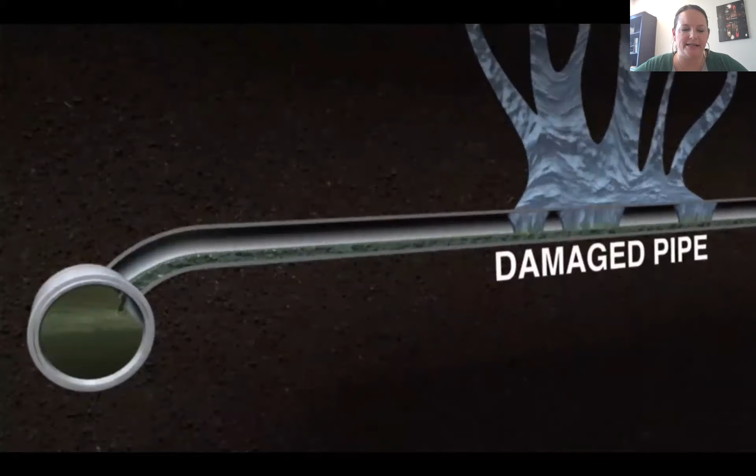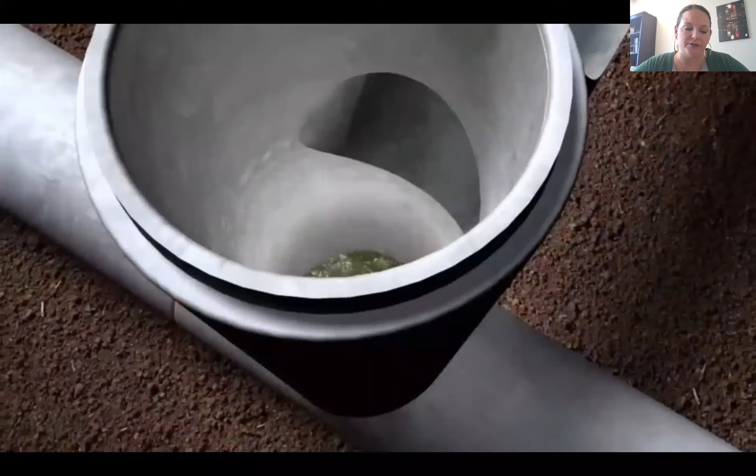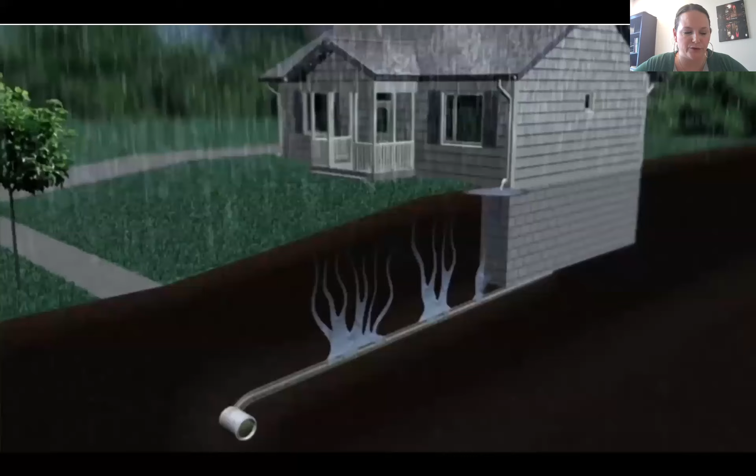When it rains, water gets into aging and damaged pipes through cracks, leaky joints, and runoff from the roof. Most rainwater is getting into the system from residential areas, and the sanitary sewers were not built to carry lots of rainwater. So sometimes during heavy rain events, the sewers get too full, overflowing into rivers, like you just saw, or backing up into basements. One solution is to build bigger sanitary sewers, which treats the symptom of too much rainwater in the pipes. However, Blueprint Columbus is designed to solve the problem at its source, keeping rainwater out of the system in the first place and routing it through green infrastructure to create cleaner stormwater discharges.

Next slide, Nick. So that's our problem. The issue is this rainwater is getting into our sanitary sewer and it's causing problems. The sanitary sewer has two ways to go: it can go out and overflow into our rivers through the storm sewer system, or it can back up into your basement with raw sewage coming up from the floor drain. Neither one of those is good at all. We don't want exposure to either one of those things. And so that is the root of this whole project, is to solve that problem that's happening right now.

The EPA put us under a consent order to fix that issue in Columbus, and that is one of our goals. The other goal that we have comes from the normal rainwater rushing down the street, picking up all the things that are on the street as well. That could be dirt, oil, trash, anything that's there. It carries it away into the storm sewer and eventually out into our rivers, so that also is polluting our rivers and streams.

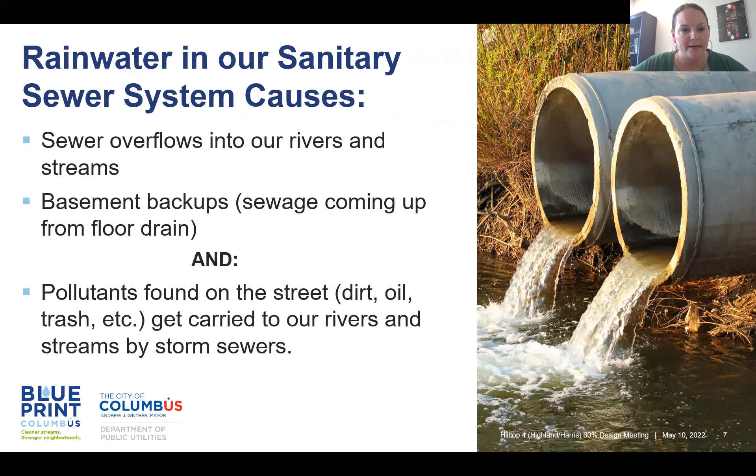Next slide, Nick. Blueprint is a different kind of solution, right? We're trying to be innovative and green, and we're interested in not only putting a Band-Aid over the problem, but fixing it at its source. So we want to fix our existing infrastructure, invest in what we already have, to create a better system, a better working system. We're using local crews, local materials, we use native plants. And all of this helps us to not only fix the issue of sanitary sewer overflows, but also to create opportunities to improve stormwater discharges.

Like I said, our project wants to invest in local. So our crews, our design engineers, project managers, outreach team, they're all from around here. We're wanting to add permanent local jobs, and some of those jobs are even the maintenance. These rain gardens are permanent fixtures, so they will be permanently maintained, and those also are jobs that are created.

As Elena had said, this project is a little different than other city projects. Most of the time the city's working underneath the ground or somewhere around you, then they cover it up and leave. But our project leaves something behind, something that's in front of your eyes forever.

That's why it's really important to us to engage with you as neighbors and community members early in the project, so we can talk about your concerns and questions, and what we don't know about your neighborhood that could help our design team leave the best product in front of you as an amenity to your community. And of course, this project also addresses the consent order requirements that the EPA put Columbus under.

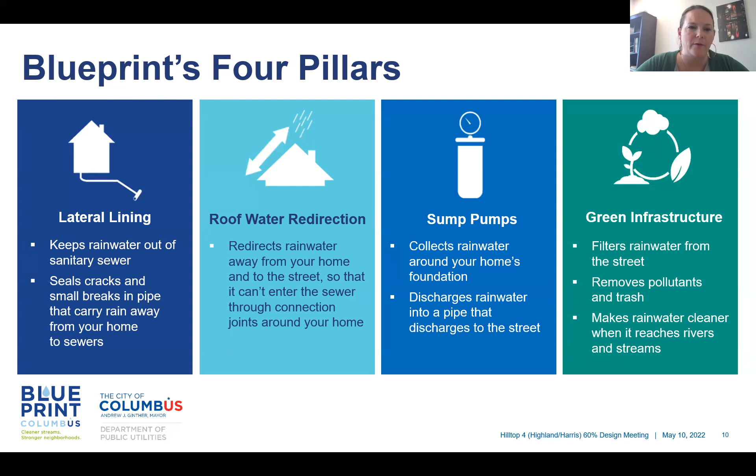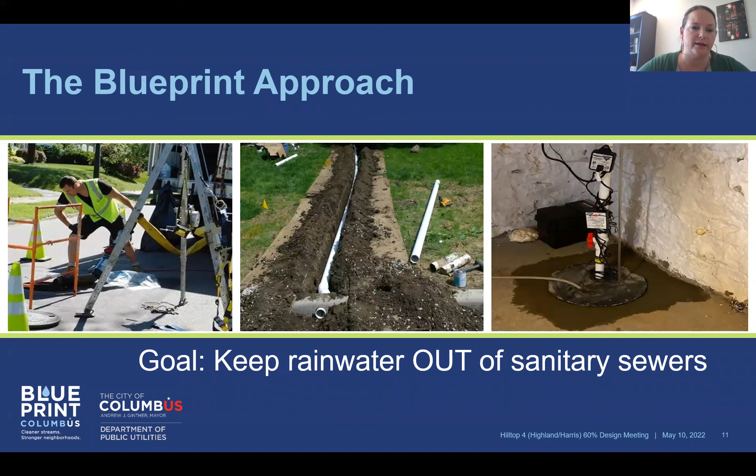The blueprint approach takes these pieces of the puzzle and fits them together. The picture on the left shows a person lining a lateral through a manhole. The middle is a downspout redirection, and the right is a sump pump. All three of these work to keep rainwater out of the sanitary sewers, whether by sealing up that pipe or moving the water away from where it could get in.

Lateral lining is done through the manhole. It's very non-invasive. We send a balloon-like structure through the pipe, blow up the balloon, and on the outside of it there's a substance called resin. That resin sticks to the inside of the sanitary pipe, and when it hardens or cures in place and we pull the balloon out, the pipe is like brand new.

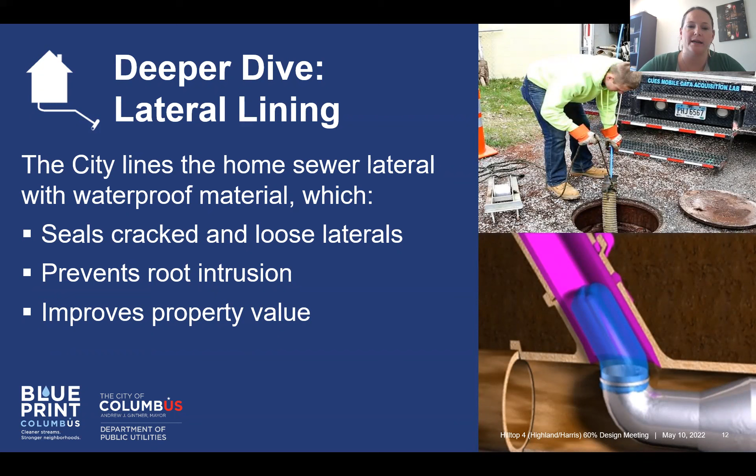Next slide. Roof water redirection is where we start to move the water away from our foundation and away from any places that could seep down into that sanitary lateral and get in.

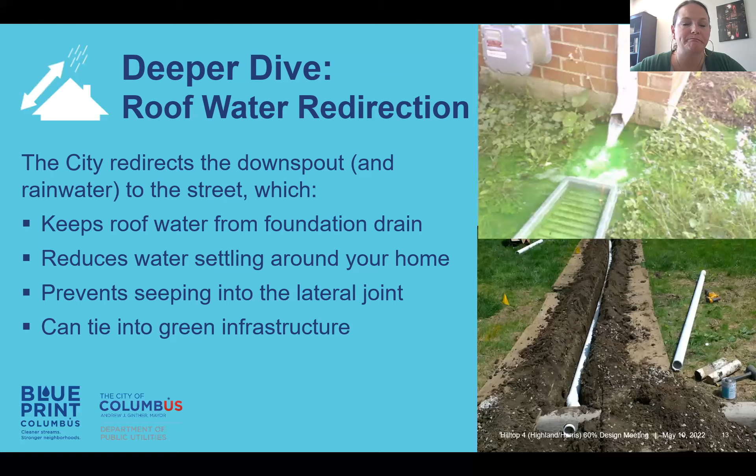Next slide. Sump pumps work similarly. A lot of our homes, again, are older, and the foundation drain is directly connected to the sanitary lateral, which is bad. That means rainwater is directly getting into the sanitary sewer system and adding to that overwhelm.

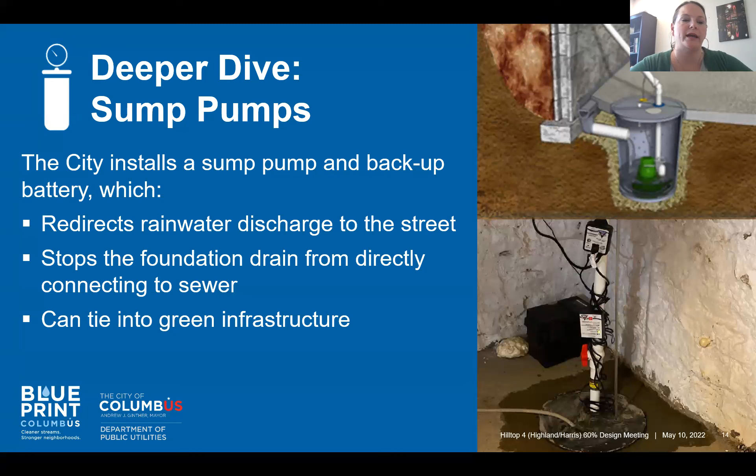What we do here is disconnect the foundation drain, connecting it to the sump pump, pumping the water up and out towards the street, again like the roof water redirection, where we can tie it into green infrastructure where possible.

Next slide. Green infrastructure itself is the piece of the puzzle that receives the water that we're moving. In the first picture, we're seeing the rainwater rush down the street, maybe picking up leaves and debris. But now, instead of sending it straight to the storm sewer, we're going to send it through this green infrastructure, and it acts as nature's filtration device, leading to cleaner stormwater discharges that you can see on the right. That's the goal of the green infrastructure.

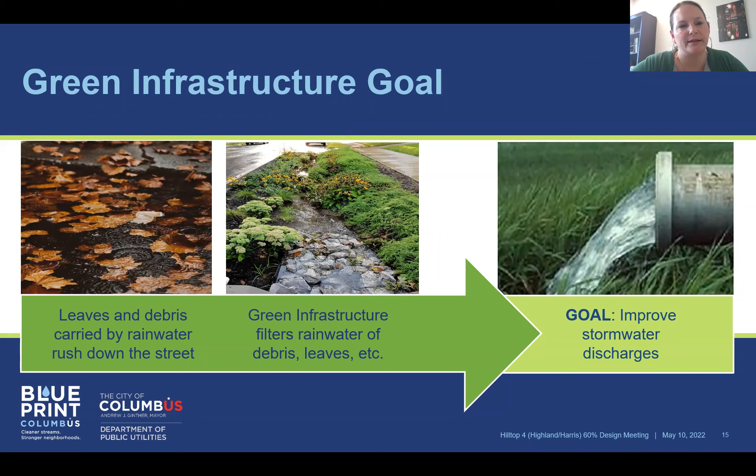Next slide. And that's also our focus today. At this point in the design process, we've got a pretty good idea of where we'd like to put the green infrastructure and a pretty good idea of what it might look like. So we're going to show that to you and talk about the different tools in our tool belt.

Left to right here, we have behind-the-curb rain gardens. Those are probably the ones that, if you've been driving around, you've seen a bunch of different kinds. The first one here on the left can have walls like this one, which has two walls. The next one has no walls, so it's more of a natural-looking landscape.

The middle picture is a bump-out rain garden. When we can't use a behind-the-curb rain garden, we maybe have to use a bump-out rain garden. Not the community's favorite, we know, but sometimes they're necessary, so we do keep them in our tool belt, or toolbox, I guess you could say.

Regional rain gardens are a larger rain garden. The city sometimes buys vacant land parcels or uses traffic islands or other empty green spaces, and we could put a rain garden there and get a lot of bang for our buck. We can get a lot of water through that rain garden and bother fewer people. It's a rather beautiful garden to look at if you're walking through the community, and we're not really working in front of a bunch of people's homes for these. So these are well liked, and we like to use these a lot.

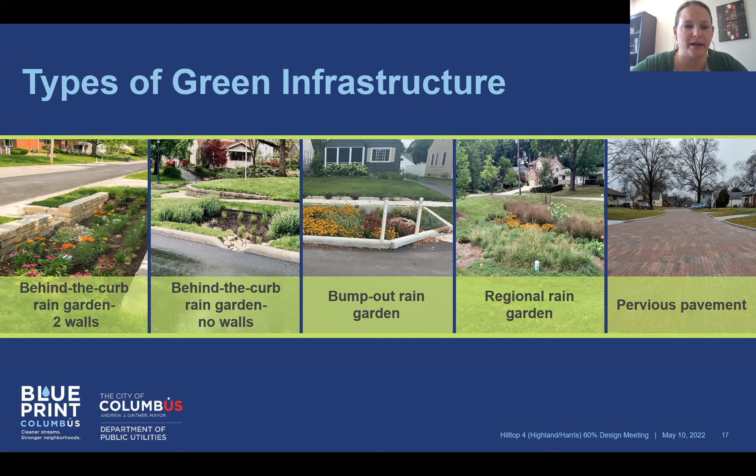Next slide. This is a cross section — how does this rain garden thing work that we're putting in? Basically with layers. All our green infrastructure is important that it has layers. In a rain garden, the layer you see the most are the plants. We're installing shrubs, grasses, or flowers, or a combination of those, as the top layer, because those are the first things that are going to absorb that water and help trap the debris and things coming through the rain garden.

These plants are special plants. Like I said, we use only native, non-invasive plants, but they also have to be very drought resistant and very flood resistant as well.

Sometimes they're going to be underwater, sometimes they're going to be dry for weeks, so they have to be able to live through both.

The next layer is mulch, and underneath the mulch is an engineered bio-soil, a mix of soil and sand that helps the water drain down quickly. Our rain gardens are designed to drain in 48 hours or less. Most of them have been draining in less than 24 hours, so that's very quick. We don't have a lot of standing water in these rain gardens, and that's important as well.

Underneath that soil is a couple different layers of different size stones, and in the very bottom layer of stone is a perforated underdrain. It's a pipe that leads out directly to the storm sewer. That's the most unique part of our rain gardens, as opposed to a rain garden you might install in your own yard, which you could, but it wouldn't have an underdrain and wouldn't be connected directly to the storm sewer system.

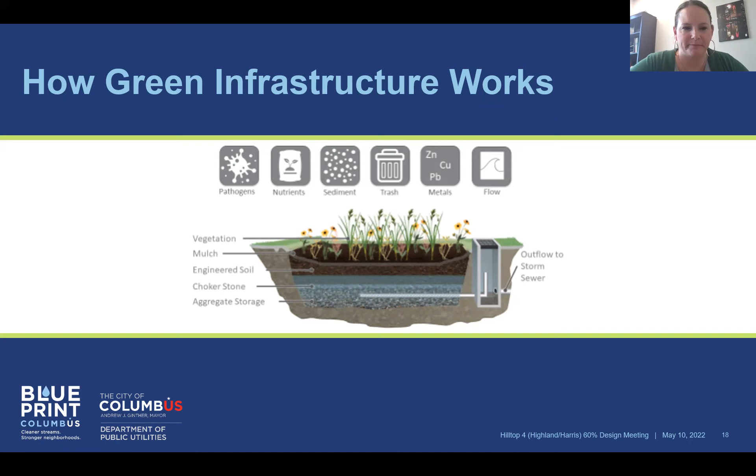Pervious pavement works similarly as far as having lots of layers to help clean the water. The top layer appears to be brick, right? It looks like brick, but it's not. These are permeable concrete pavers, and they fit together in a certain way so there's little tiny chips in between them that allow space for water to drain down through. Then underneath are layers and layers of different size rocks and stone, and also an underdrain underneath that too. So the water goes through it, gets clean, and out to the storm sewer, just like a rain garden would.

Pervious pavement has its own certain benefits. It does filter and clean the water, reduces some street flooding and ponding just because the water has somewhere easy and accessible to go. It doesn't sit for a long time. And it calms the traffic, because although these aren't the German Village bricks that jut up and are bumpy, these are nice smooth pavers. It looks like brick, so people tend to slow down before they get there anyway. The maintenance on these is also reduced compared to a regular street.

We have regular things that we do. We have a truck that comes along and sweeps these, and then we also re-chip them every now and then to put those little rocks in between the spaces again.

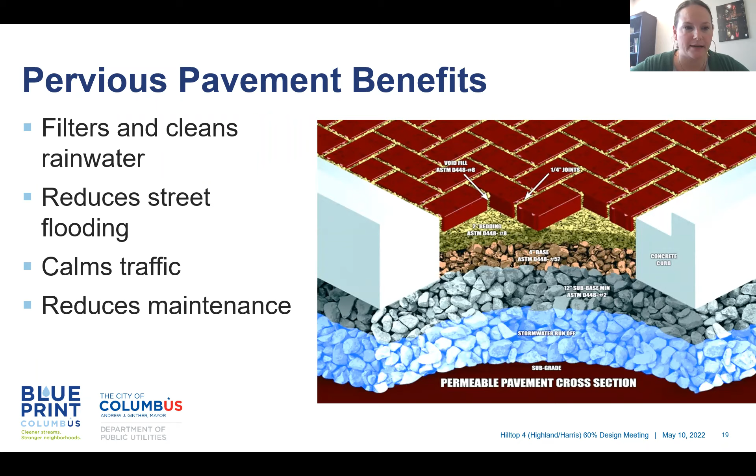With all these tools in our toolbox, it's hard to decide which ones we're going to use and where, but that's what our project manager and design teams are doing throughout this whole design process. They're looking at certain factors, like where are the biggest problem areas and how much water do we need to control, especially after we've added in the redirection of roof water and more sump pumps for folks.

They also look at where the water already naturally flows, so we capture as much water as we can by putting these things where we know the water is going anyway. They have to address any barriers too, like huge trees, underground utility lines, sewer water pipes, and other things in the right of way, as well as things that residents bring to light. We take all of that into consideration when placing these.

Also, what would improve the neighborhood? We want to leave behind something that is an amenity to the community. Not only does it meet our goals, but it also looks really nice and the community can enjoy it.

And we have a priority for this reason. We start up here in the top left box. We try to put those regionals in wherever possible. We'll look at a land bank, which is a vacant land parcel that the city can buy, or a green space like a traffic island. Then we go to some of the right-of-way rain gardens that are between the sidewalk and the curb, looking at those different kinds.

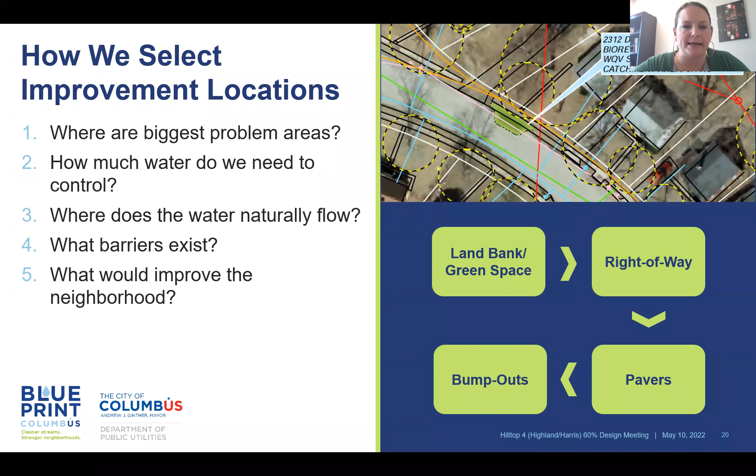And go ahead, Nick, sorry.

We also want to make sure that we say that we only install this green infrastructure in the city's right of way. We're not installing this on private property or in anyone's actual yard. It's only within the city's right of way or a land parcel that the city has bought. And they are all part of our storm sewer system forever.

So the city is responsible for all maintenance. We do not expect residents to weed these gardens or prune the plants. The maintenance team comes by once a month or more if needed to do their checklist, checking the health of the plants. Did the plants survive? Are some missing? Do they need to switch them out? Are they not thriving in that rain garden for whatever reason? They do some mulching, remove any trash or debris that finds its way in there, checking the under drains and the overflow structures and removing sediment if there's been a heavy rain.

Can you hear me? Can you hear me? Yes, Eric, do you have a question?

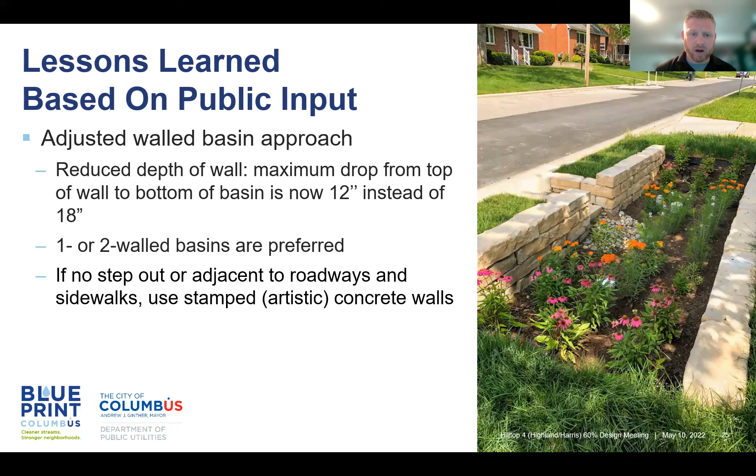But sometimes, just due to grades and depth, we can't keep the wall 2 feet back from the curb line, so sometimes it has to be all the way up to the curb. When we do that, we have to use concrete, because the wall has to be structurally designed to handle the loading from the roadway. But when we do those type of walls, they will have a stamped concrete appearance on the inside - we'll put form liners in there so it'll still look like rock and not just be a smooth, flat concrete wall. Next slide.

Other things we've learned, and some of this is from coordination with other departments. It used to be preferred that a street have rear alley access before we use pavers. It is now required. So unless a street has access, like a rear alley behind all the homes, we can't use or convert it over to a permeable paver street in the front.

One thing that comes along with the pavers, and Joe and Dan might get into this later, is when we do the pavers, we're basically rebuilding the whole roadway curb to curb, and sometimes sidewalk to sidewalk. The water mains, if they're currently in the roadway, we've been moving those out for maintenance purposes, and in most of these neighborhoods water has plans within the next 15-20 years to replace these mains anyhow. So we work with them where possible on streets that have already been identified, so we can stay ahead of each other and not have to drop back and make changes later after we've done the pavers.

We also try to replace the walks where they'll be affected. If there are current driveway aprons, they'll be replaced, because the road you have now has a crown to it to send water to the edges. When we put the pavers in, they go in almost flat, because we don't want the water to run away, we want it to go into the road. So that sometimes changes the road edge elevations, and you basically have to replace most of the aprons along the street as well.

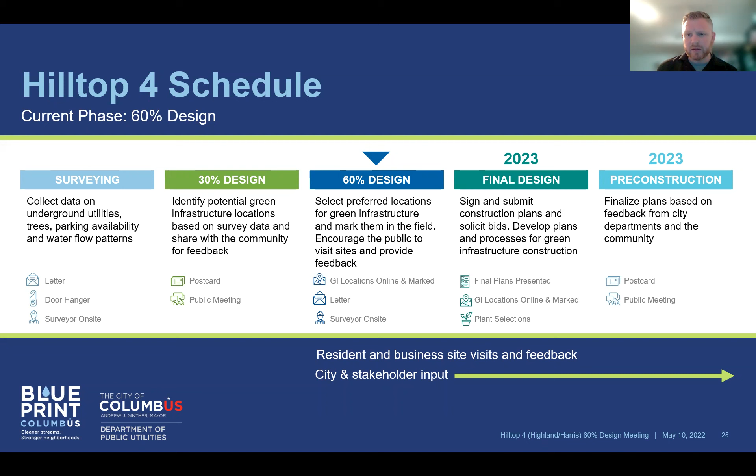So just a quick note before we turn it over to Dan: we're going to walk through map by map, improvement by improvement. You'll see some pictures, then a map of where it goes, then more pictures and a map. We expect you to have questions along the way, but when we get to the end we're going to do real close-ups of these maps. So bear with us, and Dan, take it from here.

Thank you, Marie. So thank you, Jeremy, as well. Having participated in many of these project types over my 22 years working on city projects, a lot of the project types Tiffany mentioned are gray, piped, out of sight, out of mind. It's nice to be part of a blueprint project such as this one that not only meets the project's goals, but also prioritizes local participation and beautifying the neighborhood. I want to start by thanking the city and thanking all of you for attending.

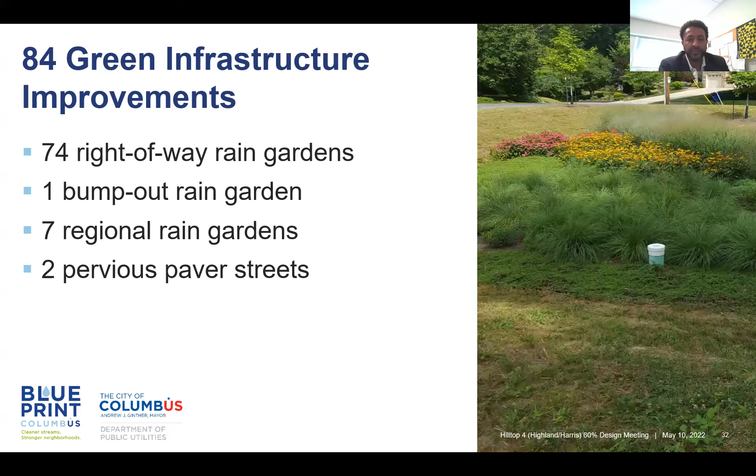So we'll discuss various of these types, and I want to hand it off to Joe now to dive a little bit deeper into the description of some of these green infrastructures. Joe?

Thank you, Dan, and good evening, everyone. As Dan said, my name is Joe Tribble. I'm the Deputy Project Manager on this project, so I'm involved in the day-to-day work, and I'm certainly excited for the opportunity to share the result of that work with everyone here tonight.

The first thing I'd like to do is talk about some renderings that our team has prepared for several of the different types of green infrastructure. These are not necessarily exact replicas of the finished product, but they are specific to our project area, and they should provide a good idea of our concepts and design considerations. I'm then going to follow up with a closer look at where these different types of green infrastructure are located within the project area. So let's start with our renderings of right-of-way rain gardens.

There are 4 of them. I believe Tiffany went through earlier. I'm then going to hand it back off to Dan to talk about renderings of our regional rain gardens and our pervious paver streets.

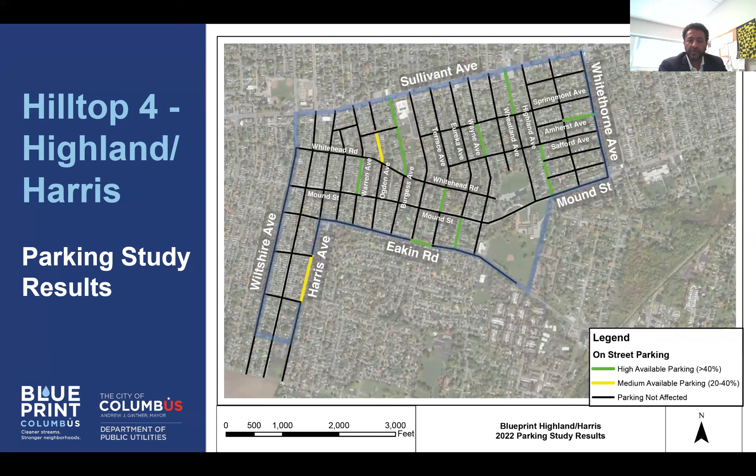So I think we're going to pause here for questions, Marie, unless you want to get through the detailed maps first and then pause for questions. Since I don't see any questions yet, let's just dive into those really detailed ones, and then I think that might prompt some questions once people can really see where things are happening.

Very good. I think it's Joe, you're up, right? Yes, Joe. I do believe I am.

Thank you. As promised, we're going to take a deeper dive into and a closer look at the different locations at which we have green infrastructure within the project. We're going to start at the southwest corner of the project, then take a closer look at the west side, and finally wrap it up with a closer look at the east side.

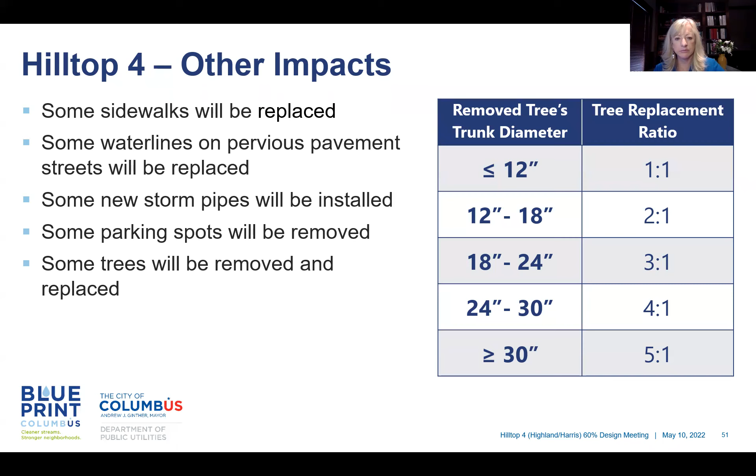Okay, thank you, Marie. So these are other impacts in the project area. Most of these items we have already talked about. There will be sidewalks replaced adjacent to most of our rain gardens and on the permeable paver streets. There will be water lines replaced in some locations throughout the project, and definitely on the pervious paver streets. New storm sewers will be installed. All of these things we've talked about, and they will be part of the project.

Speaking of the trees that will be removed and replaced, this table to the right gives you some information about how they will be replaced. For example, if an 18 to 24 inch tree is taken down, 3 trees will be planted in its place. The replacement trees will be planted somewhere in close proximity to the tree that's been removed. The type of tree will be based on the conditions in the replacement area, its proximity to the road, sun, things like that. We have an expert on our team, Chad Kettlewell, who will be doing that part of the design, and we'll be addressing that in the next phase of the project.

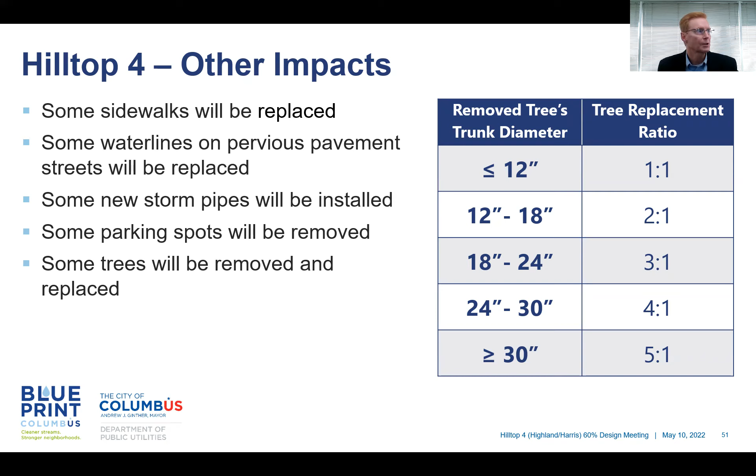Well, thank you so much, Joe. I'm going to skip this one here and go to our next steps and talk about what's next.

So what's next is, first of all, several of you gave your addresses, and there will be some follow-up with you directly about some of the questions you had. Then we are going to review and digest this feedback and your thoughts, and there's also some additional technical analysis that needs to be done. We also reach out to other stakeholders—remember you heard Dan talk about rec and parks, and somebody talked about public service. There's all sorts of coordination that has to occur, and those experts weigh in as well. So then the design will be updated and further refined as appropriate. We will alert you when we're at 90% design and pre-construction.

The team will come out again and mark the updated green infrastructure location, so you know if it's something in front of your house. And residents who have a basement with no sump pump are eligible for an inspection for a free sump pump.

Nick, if you go to the next slide, it gives you information on where to learn more and sign up. Now, I believe Tiffany mentioned earlier that you're in the process of ordering some, but they may not be quite ready to go out on the street yet, but coming soon. Do you want to elaborate on that?

Yes, so we will be opening up the sump pump contracts later this year for this area. We normally don't release a contract until about the 60% design marker of the timeline. But the contracts will hopefully go out later this year, and then they'll start calling down the list. Wherever you are on the list, they should probably quickly get to you. I don't think this list is super long.

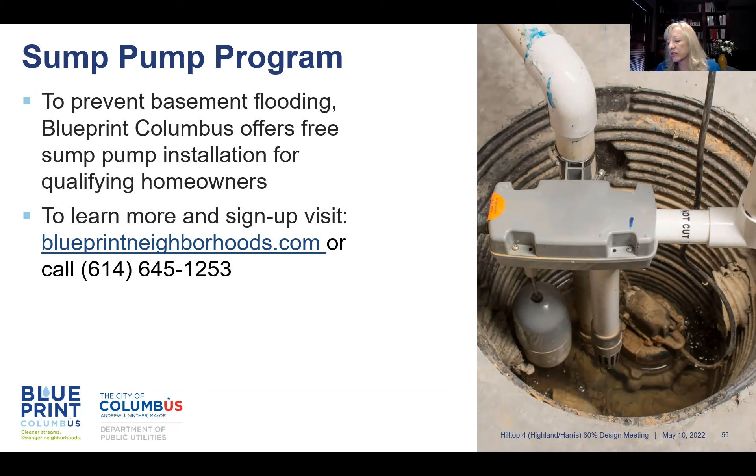So Eric, you've got about 60 seconds, what's on your mind yet? I think I saw your hand again, but maybe I didn't. Yeah, you did. Okay, I just wanted to add, I was going, blah blah blah, is that fast enough?

You know, I was just thinking about that canal too. You know, that could be routed down through the Ohio Department of Rehabilitation and sent through the park down to the foot of the hill, where the baseball park is. That canal could actually be routed to the dry run.

Well, I know you've given everybody a lot of great ideas to think about, so we will digest some of that input, and I know they're going to talk with you directly. I so much want to thank you all for participating tonight and being such good sports. As you can see, we have contact information. Nick, if you can go back one slide, it has our phone number and email address. So if you feel like you didn't get your question answered or want more details on your specific property, please email us and we will get back to you.